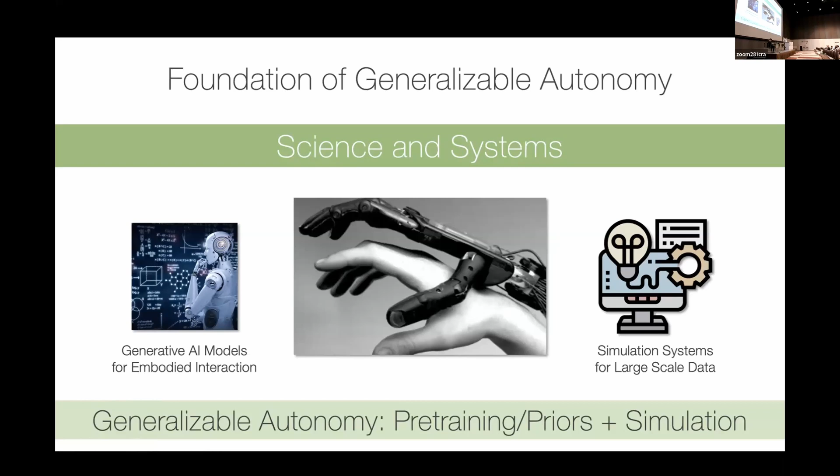And at least in this case, what happens is all of our friends in computer vision have a shit ton of data. We got inspired by all of the people doing LLMs. So we want to do robotics and foundation models. And we want to figure out what is the robot GPT. There's just one little problem. The problem is robotics is many things. It's warehouse, it's kitchen, it's lab, it's all those things. Can't have data sets for those things.

And even more importantly, robot data just doesn't happen to be lying around on the web to be mined. You need to create it. It's very different from vision and language. And this is where simulation comes in, right? That you can really think about how to create data with the simulation that is efficient. And then this is exactly where it comes. That scale by itself is not sufficient. You really also need to think about algorithms.

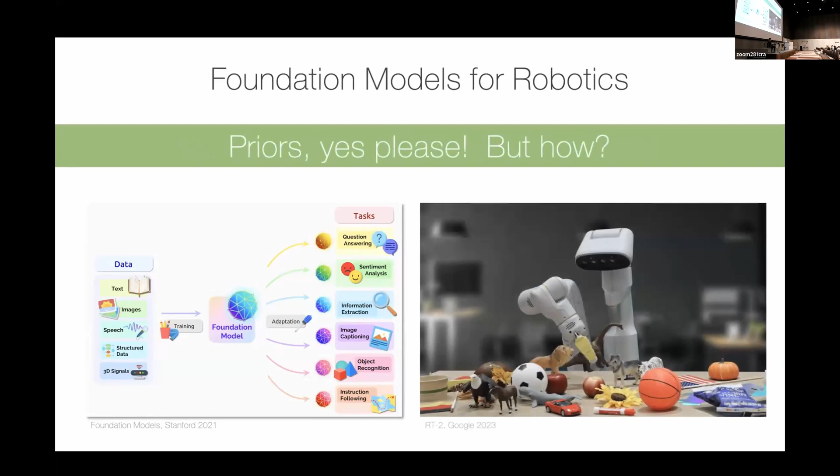In this particular case, if we have the data pipeline, ideally we would like to solve these problems with a single model. I don't want to be solving one problem at a time. It has not been a scalable solution. Right. So what I'm going to talk about is two things, two ideas that we have found very exciting. One, thinking about how we can leverage language models for general purpose planning and control. And we'll give you one example of how we were able to bring that idea to lab automation. And then we'll also talk about what sort of frameworks and simulations do we actually need, and how can we help each other build a community like that.

Okay, so one thing that has been very, very exciting, it might not even be news to you, is we want to talk to our robots and tell them what to do. The problem is the gap. When you tell ChatGPT, I want my robot to do X, ChatGPT needs to be able to talk to your robot, but your robot doesn't understand English. So this is where the community is sort of arguing that maybe talking to an LLM, but the LLM outputting code, which is formally known as program synthesis, is a very good idea. And this is something that became super popular about last year. There were like dozens of papers and we worked on it as well.

And the basic idea goes like this. You tell the robot, I want to make coffee. The robot generates a high-level plan. You need to go to the kitchen, grab the cup, so on and so forth. Then it outputs something that is in English. Of course, English is not executable on the robot. So what we'll do is create a plan that is code-like. Notice I use the word code-like. So this is not Python, this is Pythonic. It's readable, but at the same time, it's also machine readable.

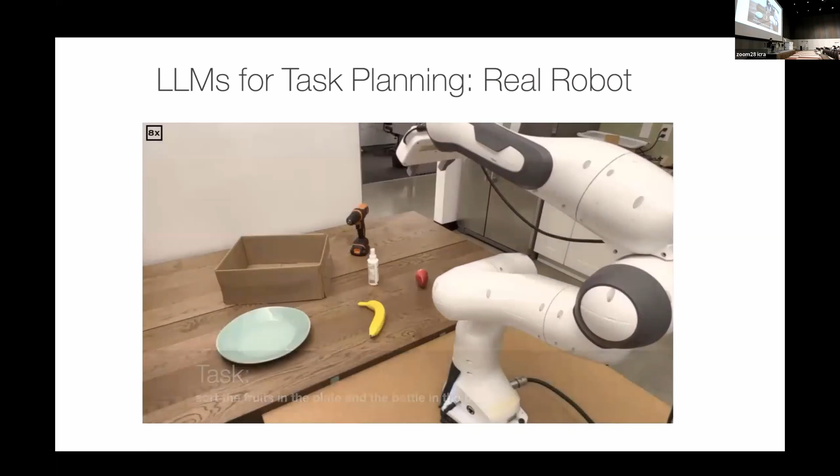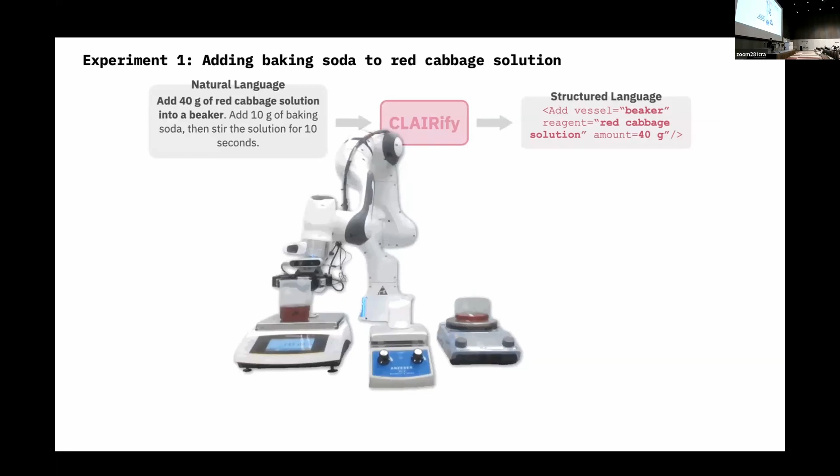This is the kind of thing that I was saying earlier that we need in our lab. Put powder A in place B, right? You don't want to locate these things. You don't want to detect these things. This should be general purpose, right? We were able to extend this to chemistry-like experiments, grade chemistry-like experiments. It's like, add baking soda to cabbage solution.

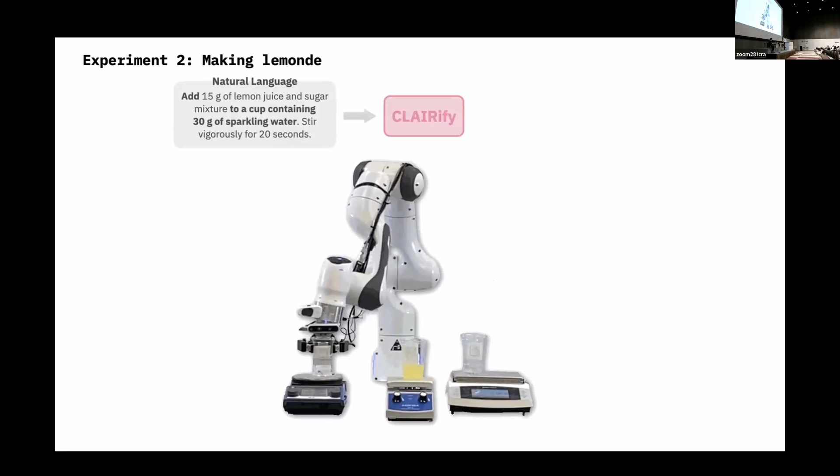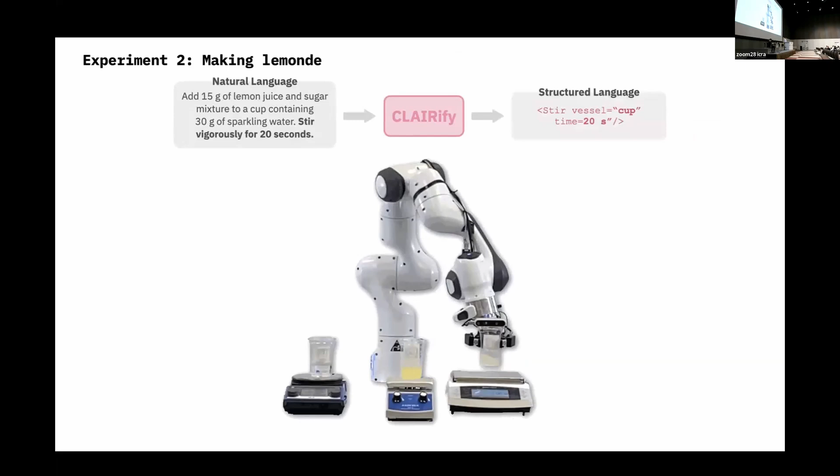So you go from that to a structured language that is PDDL-like, not necessarily PDDL complete. You can make lemonade, of course. And you can have very specific instructions, right? Add 15 grams of this, and notice that there are these components from the chemistry lab that are now in the system. And you let the LLM know what exists in the system so that it can actually figure out how to use it. Okay?

So this was the beginning of what we call Organa. Organa is the assistant that you wanted that does everything in the lab. And of course, this is a first prototype. I don't want to say that this is the solution, but this is what I believe will be the solution. What you really want is a system that you can talk to or interact with in a very no-code manner, ideally even very much like language.

What happened last week, right? Google and OpenAI released their new models where you can just talk to the system, Astra and GPT-4o. And they're basically like this. You can talk to the system. You want the system to be flexible. It is important that you want to be able to do many things. You have one kitchen, but many recipes. And then you want the system to be modular because the system should be able to improve as components improve.

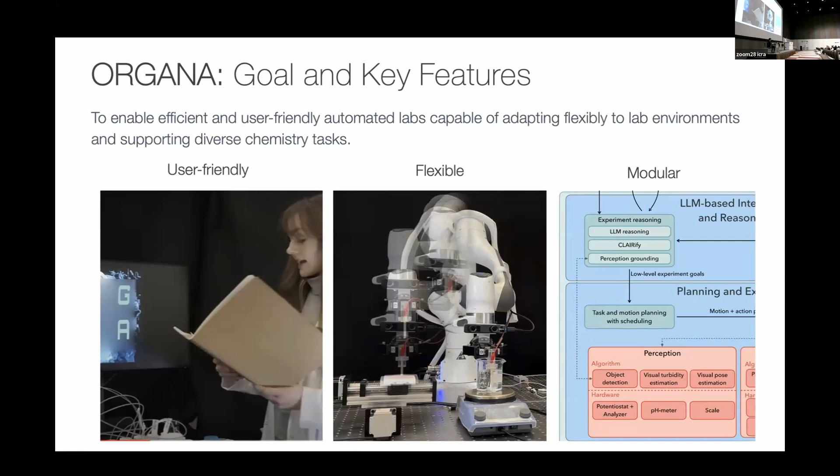This is the big picture architecture, but I don't want to get into the details of it, but I want you to understand the big picture point. The big picture point is you talk to the system, there's an LLM that talks to you. The LLM calls a system that creates a plan, like what to do with what you want. Then that plan is passed on to a robot that executes that plan.

The robot outputs something that is analyzed, and based on that analysis, you will do the experiment again, or you'll basically have the human come in the loop. Notice the human interacts with the system only at planning and analysis level. Right? The human is not doing all of the robot stuff.

So I don't know if the volume will play here. But this is how it would work.

There is a user. The user is the first author here in this case. And Marta talks to the robot. And we don't have captions, but basically she's saying something to the effect of, Organa, I want to do X. And then Organa talks back. And she asks questions, or I should not be using she. Organa asks questions. And basically, in this dialogue, what is being established is the parameters of the experiment. This is what I want to do, and this is how you can do it.

Right? Now, if we were to use simple LLMs to just output naively what needs to be done, there can be places where there are errors. LLMs hallucinate all the time. We do not expect them to be correct, especially in a domain which is not what they're trained on. So this is where we have a prior work which we called CLAIRify. CLAIRify basically allows you to fix LLM output to be meaningful and, let's say, robot viable.

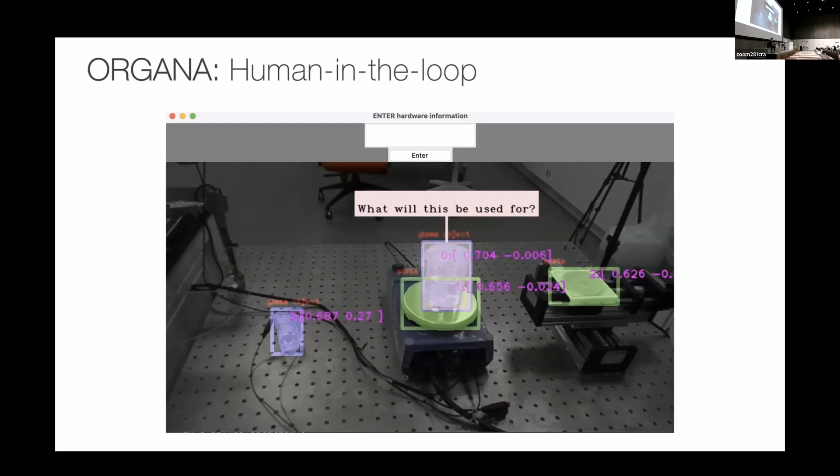And now the human in the loop process basically can say, you can have human in the loop for doing history of experiments. You can ask the LLM, what do you see? If the observations don't make sense, you can provide feedback. So this is the setup phase, right?

Phase 2 of this system is once the task has been specified, you go to task planning. In this case, we use the latest and the greatest in robot task planning. I don't want to bore you with the details of how this works, but it works. This is something that is the workhorse in robotics, PDDL-based task planning. This can, of course, be based on machine learning as well, but you can use different modular components.

The system allows scheduling, so you can have more than one robot while planning. So you're not only doing larger tasks, but you can also make sure that they are multiplexed, so you can increase the utility of the system. And now it's the robot actually.

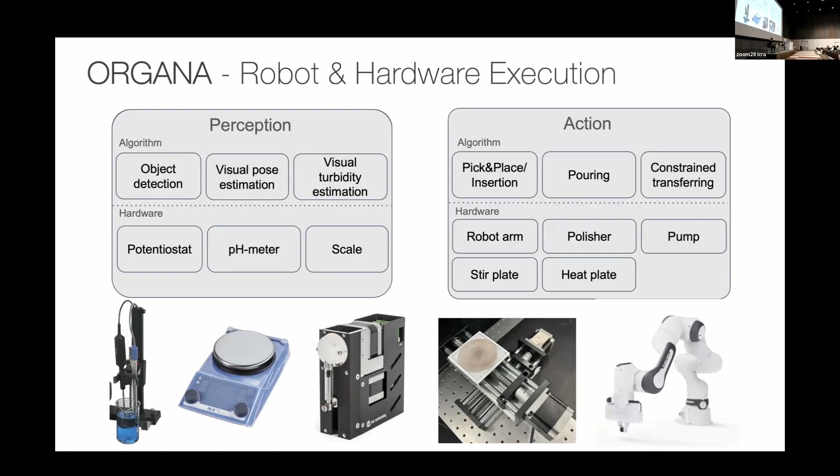So you might have perception modules and action modules. You will have the robot, of course, but you'll have other things. Other things meaning you might have devices and sensors and characterization devices. All sorts of them, they need to be interfaced. So the language model and the decision system needs to know what exists in the world so that you can use it.

And then we have a perception system that is also based on foundation models that is zero shot. So you do not need to train it for your beakers or your lab. It should, in principle, work out of the box mostly.

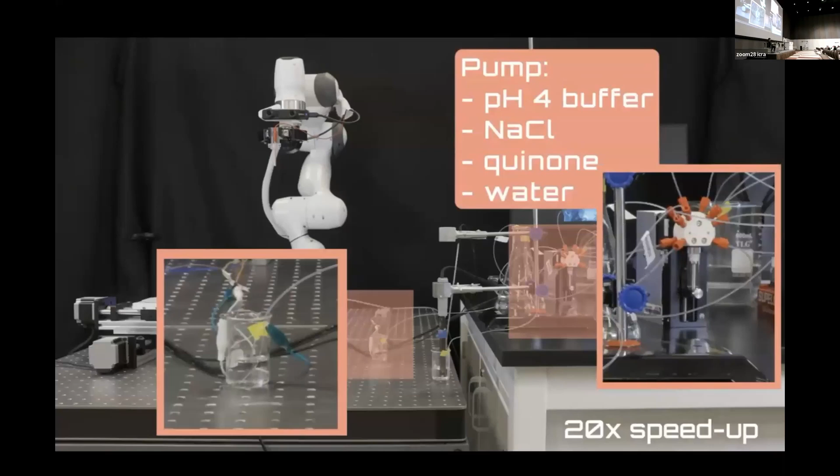So this is what an experiment looks like. You told Organa to do an electrochemistry experiment. It figures out how to use the pump. This is running, of course, at high speed, and then it is moving things around. The important thing to note here is we did not structure this.

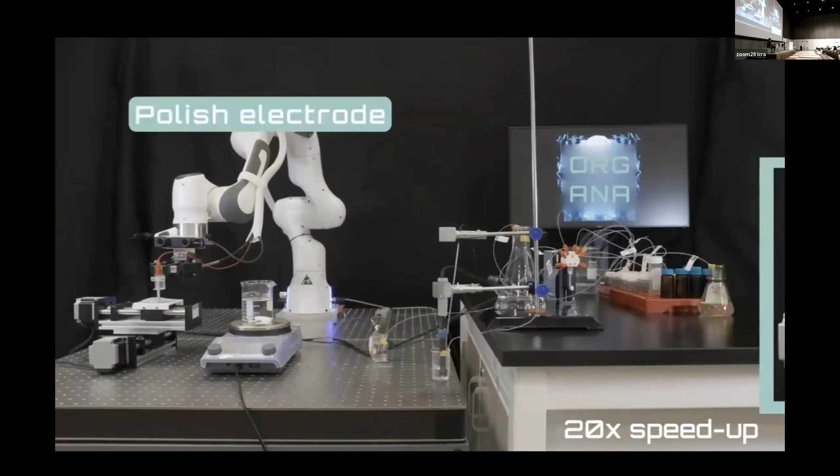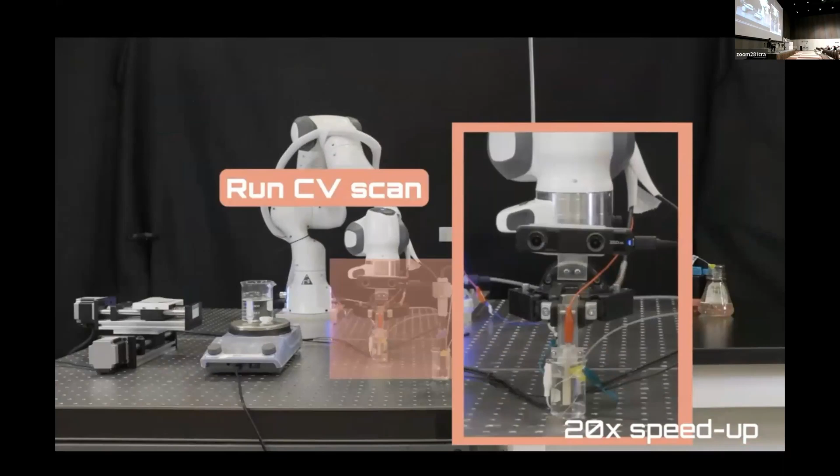This is slightly different from automation in the sense that it can do many things depending on what the input is, as long as the process parameters and the process, let's say, equipment exists in the environment. So if you ask it to use a weighing scale, it can use a weighing scale.

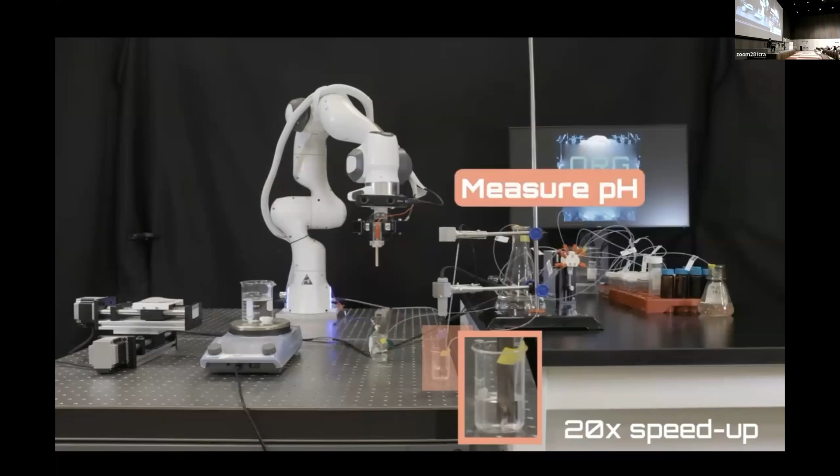Now, these are the places where you can parameterize things, meaning you might have different types of weighing scales. Some of the weighing scales might directly be digitally interfaced, so you don't need the robot to turn it on. Some of them might actually need a button to be pressed. All of that, in principle, is possible, but those things need to be built in. We need to do that.

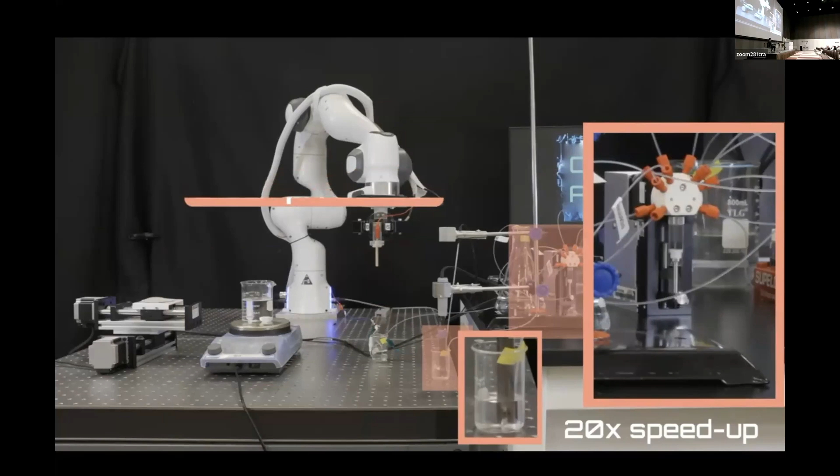I do want to claim, even though I'm very excited about this, this is not a silver bullet yet, so don't get carried away yet. So we tried a bunch of experiments. We tried solubility, recrystallization, pH measurement experiments. Each of these things have a few steps, of the order of 5 to 10, and the mean time to execution is of the order of minutes.

So you need long-term autonomy and memory so that the system doesn't sort of stop working, right? The interesting thing is, at the end of the experiment, it generates reports automatically. This is exactly what you want, right? You want graphs, you want plots, and you want effectively what the synthesized output is.

And this is one iteration, because Organa in principle operates iteratively. Like you can have iteration 1, then you might say, okay, you did not do this right, or why don't you do this other thing? And it can go back and do this.

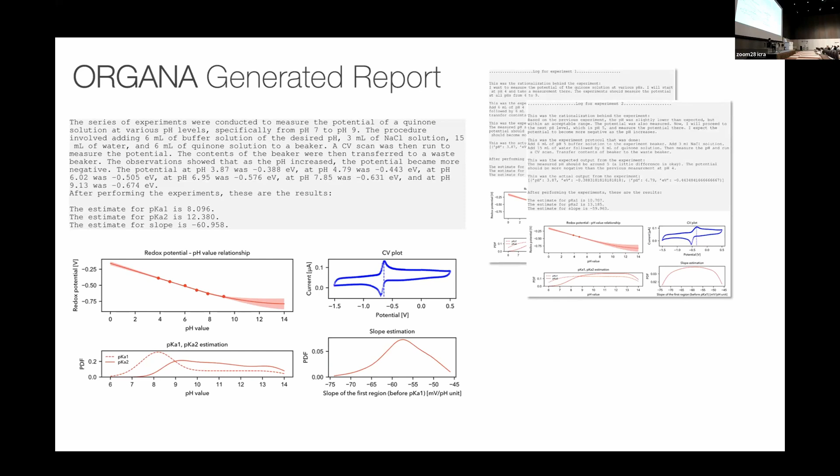In the panel session this morning, I was also talking about different levels of abstraction. So Organa essentially does the low level. Everything that is physical and moves is this, but all of the high level AI-based decision making and, let's say, potential synthesis or generation of possible things to do is still a high level model. And you can have different models simultaneously working together.

This is an important thing to understand, that even though the human is in the loop, the human is not on standby all the time. So in an order of, let's say, an hour or so, the human is actually asked for about 1 minute in the loop. So a single human can actually take care of 50 of these things fairly well, right?

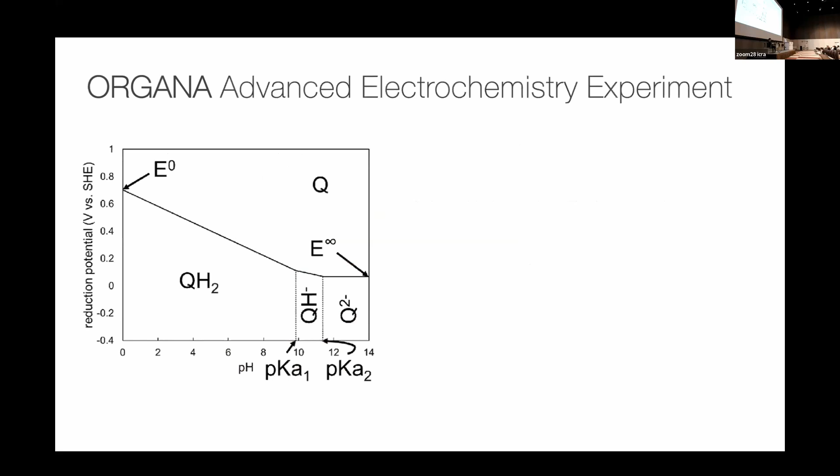So you can do experiments like advanced electrochemistry experiments where you're basically measuring pH versus voltage. In this particular case, we are interested in generating Pourbaix plots. And Organa results in a reasonable Pourbaix plot that is comparable to what a human result would look like in the sense of iterations and data quality.

To a chemist, it doesn't matter, or it shouldn't matter, how the robot does it as long as it does it, right? So this is the point we are trying to make, that you can do meaningful, non-trivial experiments and the data quality is kind of the same, at least for simple experiments. Of course, these are very simple experiments.

So one thing I want to convince you is, this is not necessarily the solution, but this is definitely the right path towards building general purpose solutions where we build these systems and they work broadly. So that was one part of the system. Now, as I said, even if we did it in our lab, the ideal success of this system would be when it works in your lab, and you can just download and run.

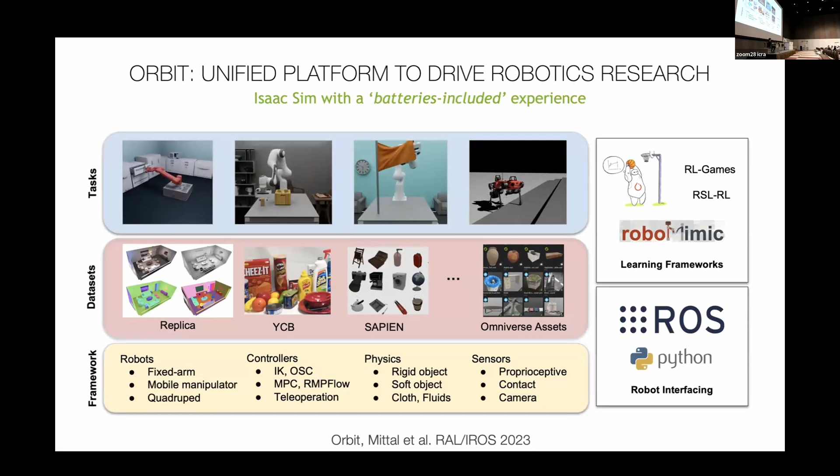Right now, we have to do a bunch of engineering for each of the low-level components to work, right? We need to make sure that the robot can actually turn on and off things, or it knows where everything is. And this is the part where I believe simulation comes in. I am a very big proponent of simulation. So I've been building what is called Orbit. This is not only for chemistry, but actually generally all of robotics, building common frameworks that help roboticists and all sorts of robot learning.

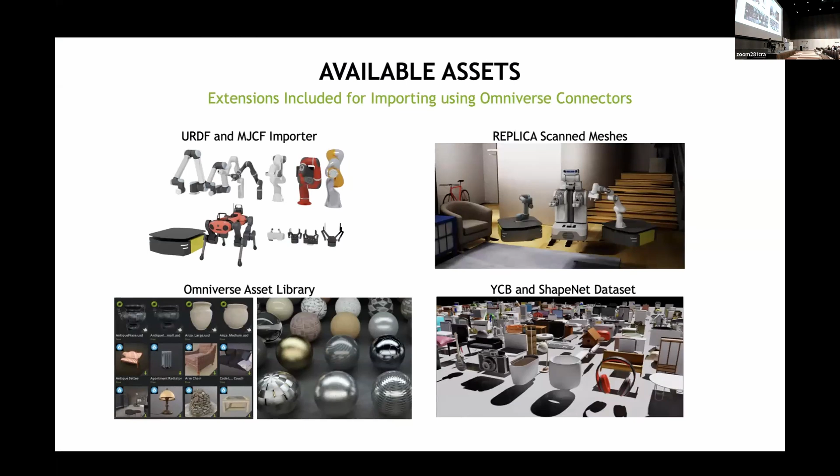We have built what is called Isaac Orbit. It's a general purpose thing. You can do all sorts of tasks with robots, whether it's folding t-shirts, pouring water cups, and it doesn't even have to be fixed robots. You can have all sorts of robots. It could also be bring your own robot. A bunch of environments and assets are inbuilt. We provide generic examples so that you know how to do development. It works with soft objects, t-shirts, cloth, fluids.

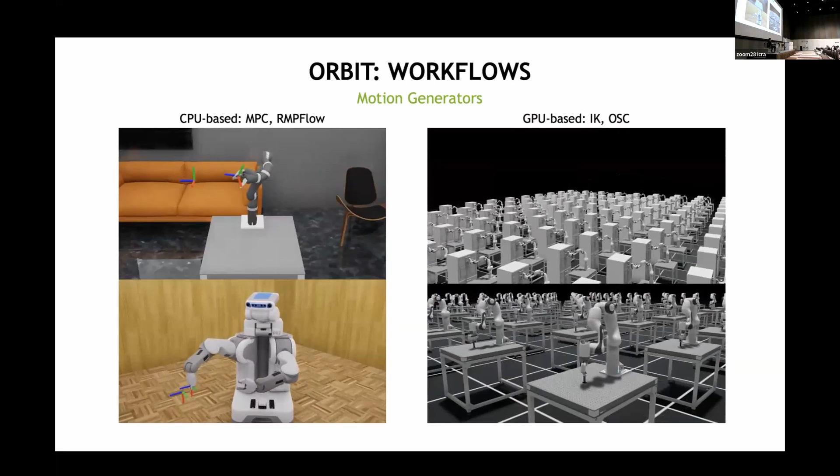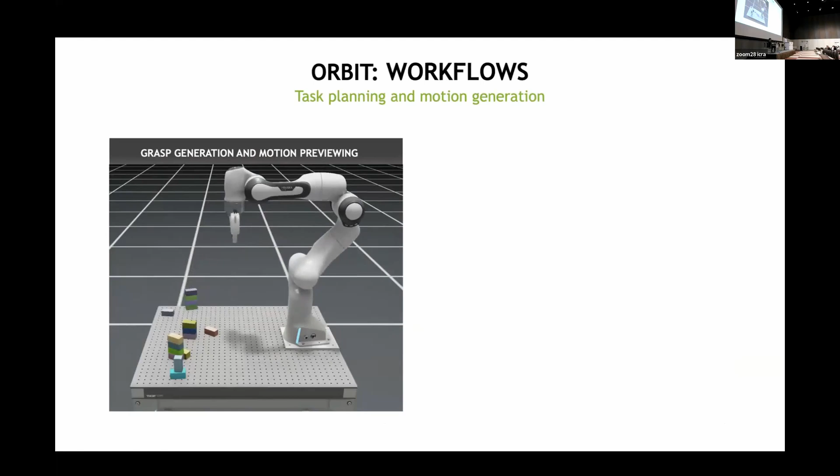And the interesting thing is, we are not being prescriptive of how you will solve your problem. If you are interested in machine learning, do that. If you're interested in motion planning, do that. So you can do this. You can test and evaluate. I think Rafael was saying that it's good to test that a robot, when moving, will not hit the limits of something. You can test the existence of a human in the environment. You can put it on a real robot, if that's what you like.

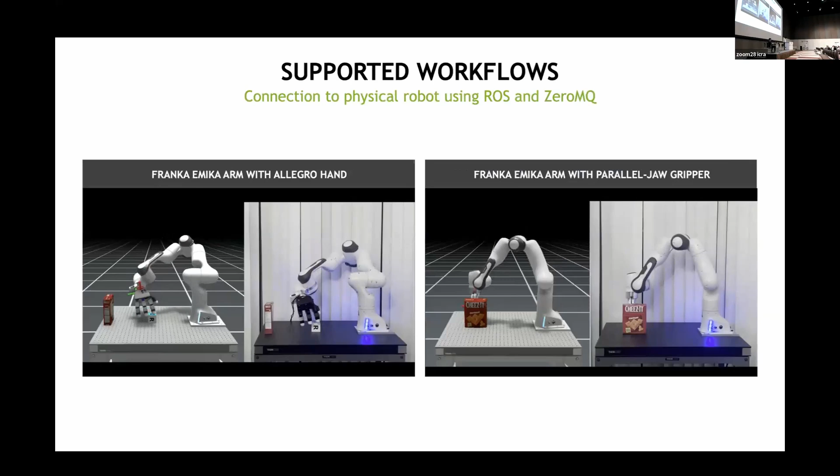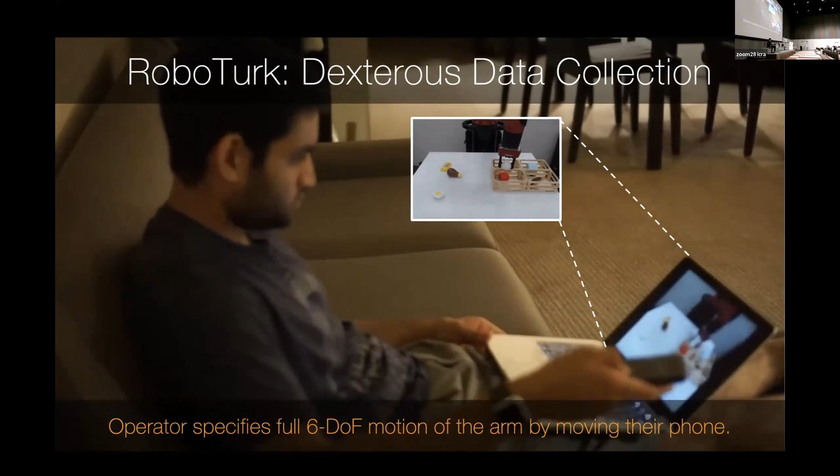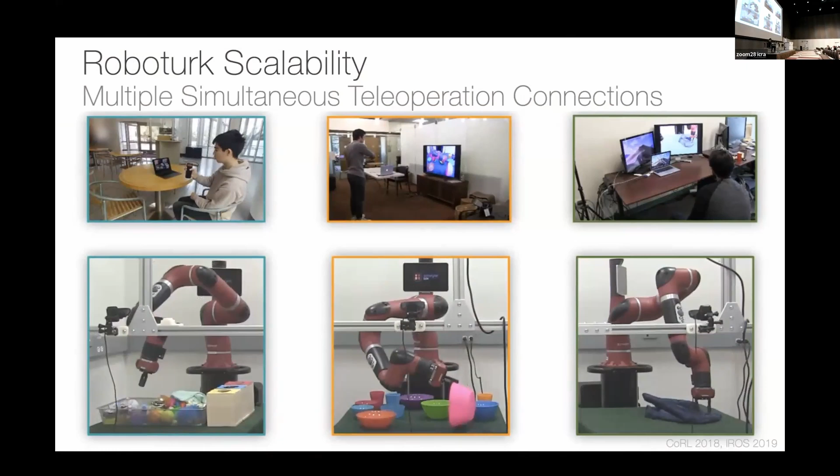And even more importantly, particularly for laboratory automation people, you can do remote teleop. And that means you can do remote monitoring. If something doesn't work or the robot is not able to do it, it can call you. And all you need to do is Zoom call into the system. So all you need is a phone, and you can remotely teleop the robot to do whatever it needs. So for example, if there's something that the robot is stuck on, you can help it. You don't need to be in the lab. So remote teleoperation is very useful.

The cool thing is, all of this is open source. You can use it now. It is fairly general purpose. And it has an active community of developers. So if you find something that doesn't exist, please contribute back. To convince you that this is fairly general purpose, NVIDIA has adopted this for its current effort in humanoids, and it's throwing a lot of heft behind this.

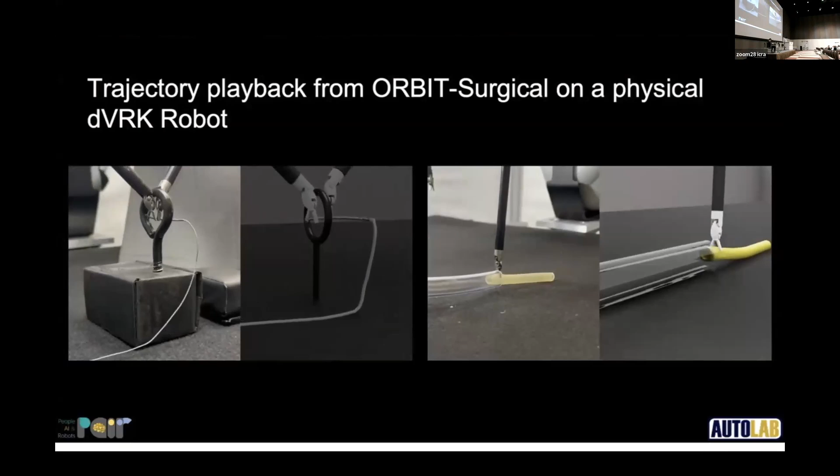We were able to generalize this idea, because this is general purpose, to surgery. This was a paper that was presented yesterday. You can bring a surgical robot in and do fancy stuff like threads and rubber sutures. We have already interfaced LLMs with it. So you can talk to it. So a surgeon can say, pick up the needle and do this, and then do that, and this thing works.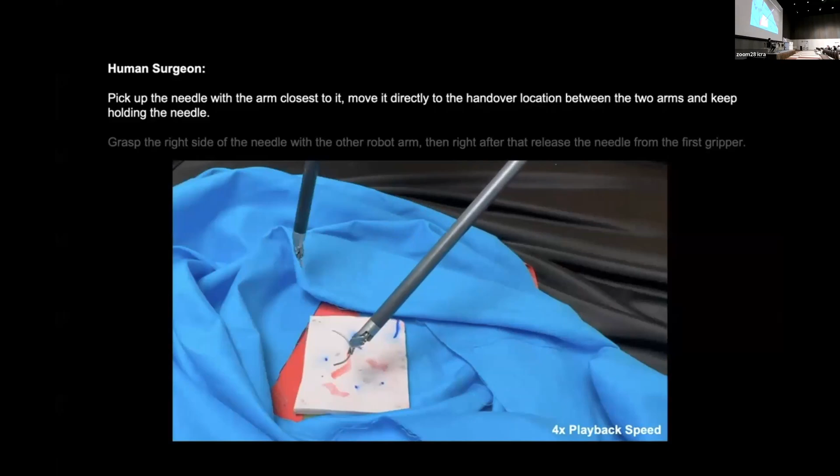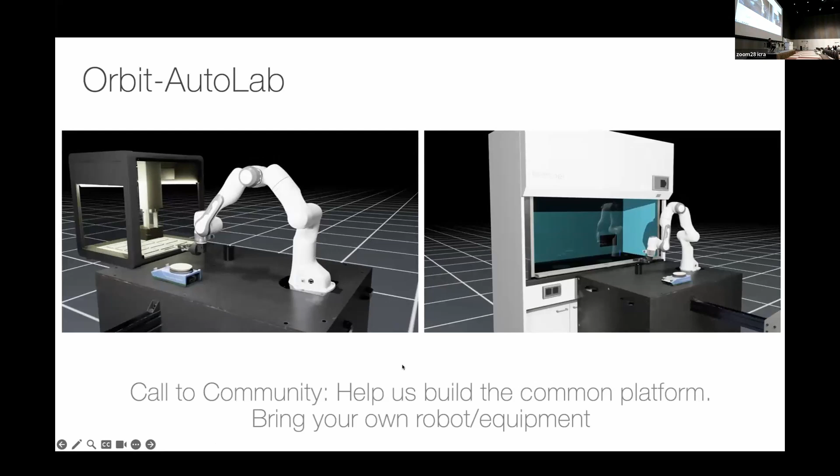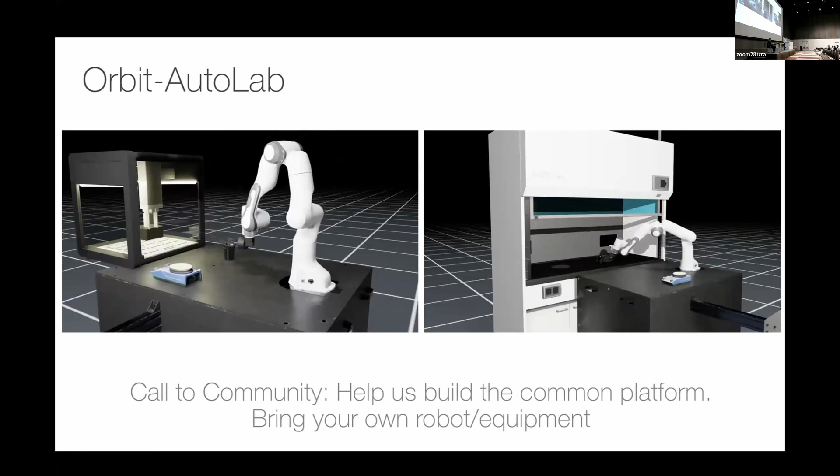And importantly, a collaboration with the organizers. We are building what I would like to call Orbit-AutoLab, where we are now bringing chemistry-relevant objects, tasks, assets, materials into the system. It's not there yet, but we need all of you to help us out. We want this to be a community effort. We do not necessarily need to own it. Only when done together would this be useful. And the vision I have here is, for all of us, we converge on some platform that we can use together to create benchmarks and make progress on this together.